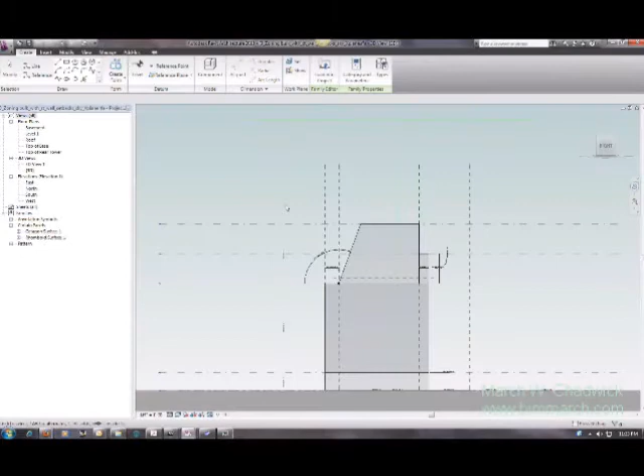Okay, so when I say open this file, you'll see the conceptual mass environment that is controlled by many parameters, or many reference lines, that are kind of floating in space, but that are attached to reference planes and lines.

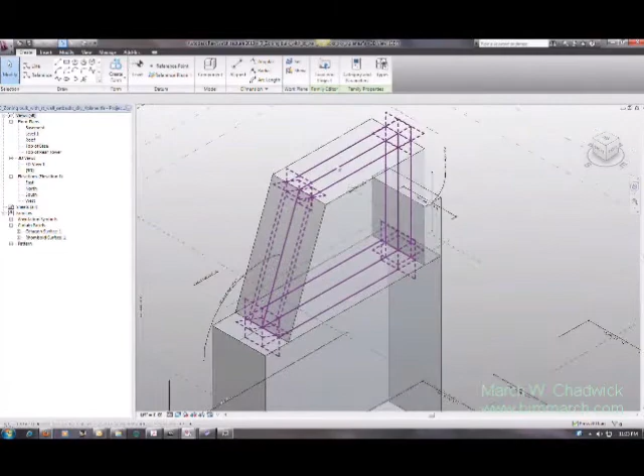This is actually a reference line, which has an interesting character. It comes in with a horizontal and vertical plane, so that you can control its angle, as I've done here with this parameter, which is kind of interesting.

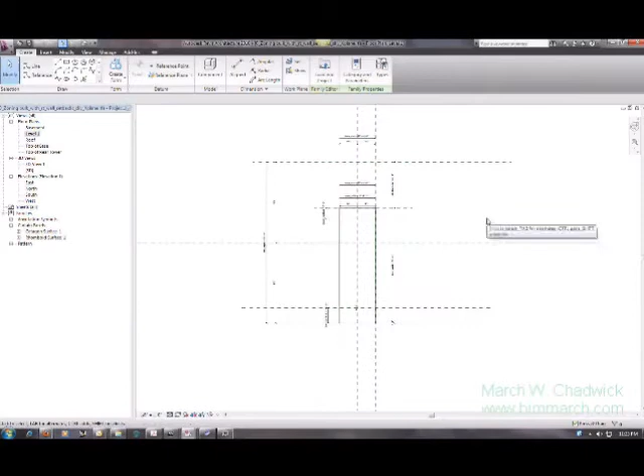Let's go into a conceptual exercise by focusing on what the lot lines are. Now, the lot lines in this particular family don't appear, but I have controlled what the site width is by these reference planes. Now, the building width is on this reference plane, which I'll show you.

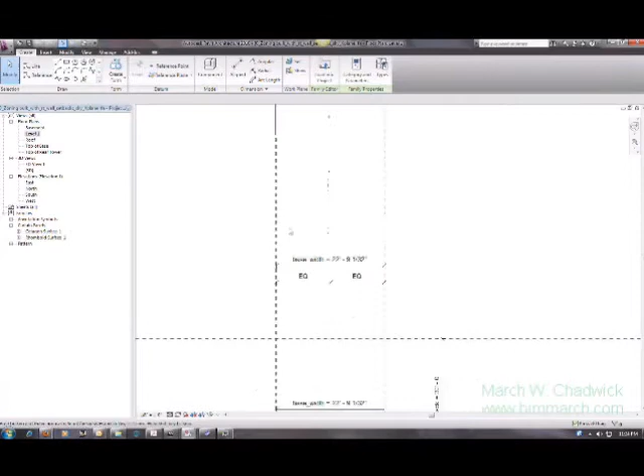By zooming in here, this mass is controlled by this reference plane because of that 2-inch setback that's required in the building envelope. Let me go to the 3D view one more time, and I'll describe to you.

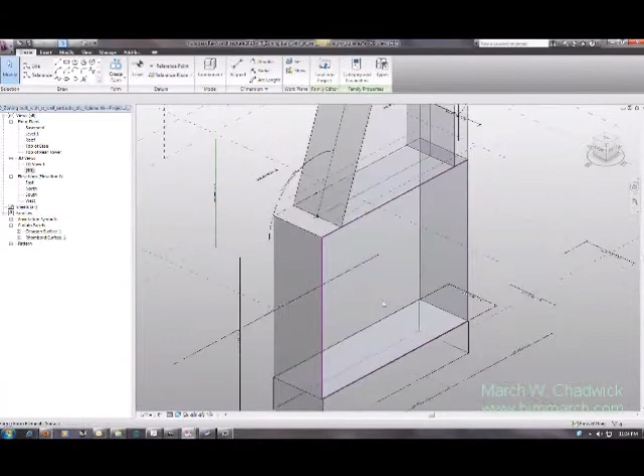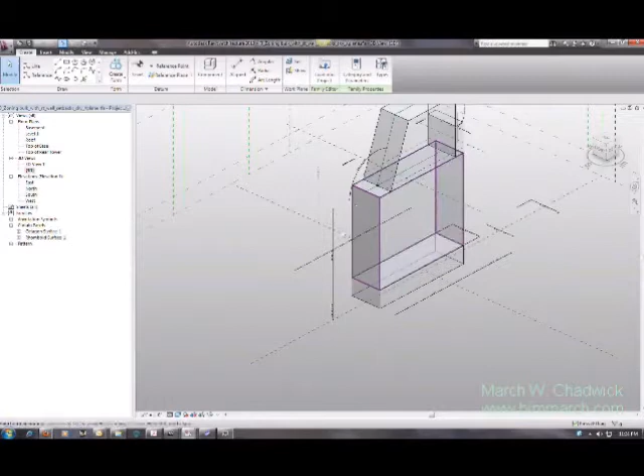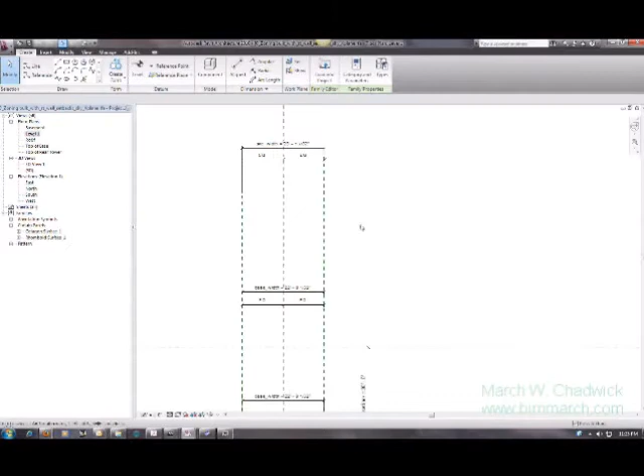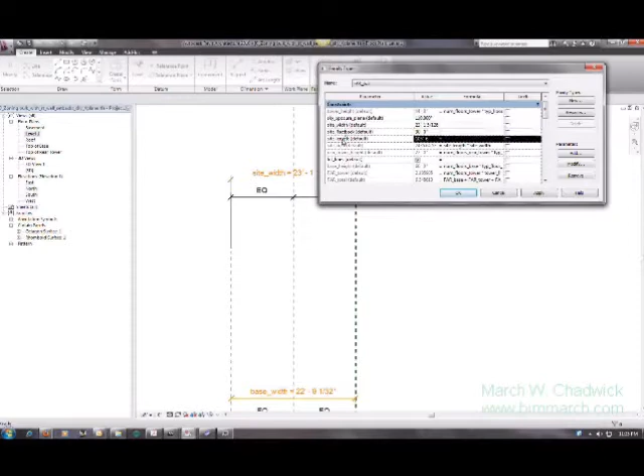Now, again, this site width and the site length are controlled by the parameters that I've set here. If we go to the first floor level view, you can see that if I wanted to adjust the site width, I can go into my types dialog, and here within the constraints, I've created all of these parameters that control the site width, the site length, and the rear setback.

Most residential properties, you're going to have a standard of 30-foot setback. So I'm going to ask you to just kind of stick within the site line, beginning here, going along this line here, and ending here, and this is the front line, and then this is the another side yard here.

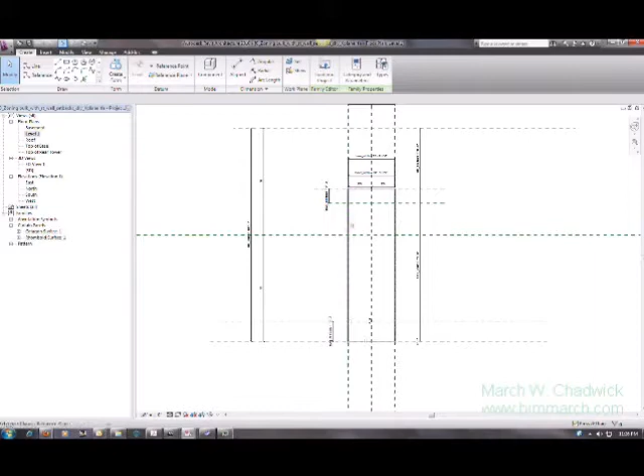Okay, so within this family, I'm going to go back to the 3D view. I've created again all these parameters that control the height of the base. Let's change the height of the base real quickly.

I'm going to the types, and now I'm in the family, but all of these parameters will show up in the project once you load the family into the project. But I'm just going to do it from the family here.

I'm going to increase the number of floors of the base. Here it is, actually 6 floors right now, and those floors are driven by these calculations, which I've totaled up down here. You have to set up the typical floor height, and that floor height goes into a calculation that ends up being driven by the number of floors.

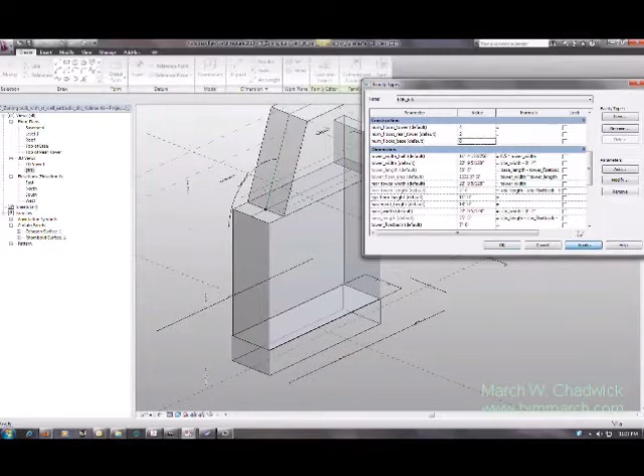Okay, so if we adjust the number of floors to 7 or 8, hit apply, you'll see that the family is driven, similar to the blocks that we created, by that reference plane that's here. Shift, and then holding the track wheel in, and I can pan around.

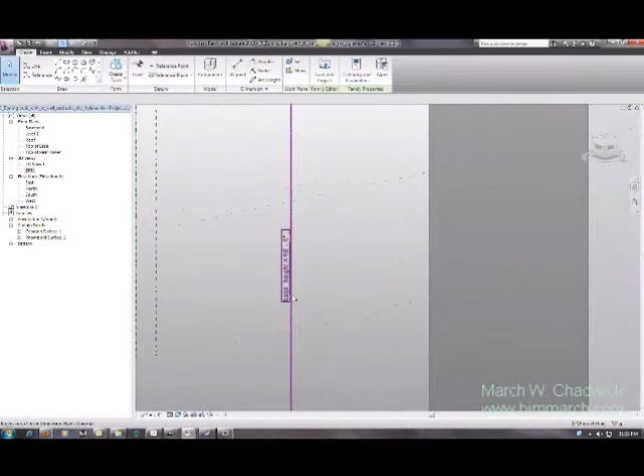So that reference plane is controlled by the base height, and the base height is controlled by the number of floors here. So the number of floors are calculated and go into a calculation that describes this parameter, which is the base height.

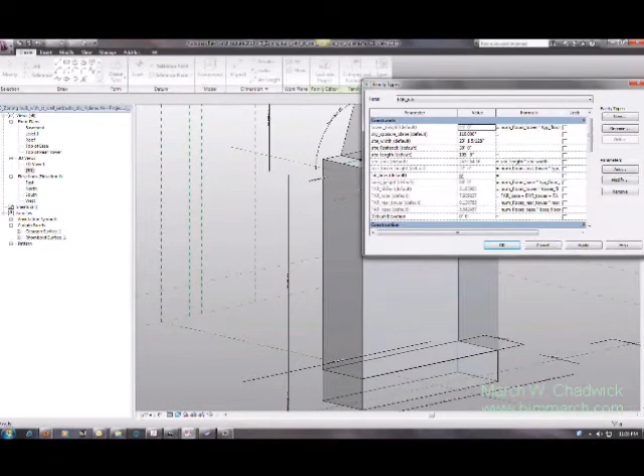Base height is here. The base height is actually one of the constraints I listed in the constraints. But you notice here I can't change this parameter because it is being driven by these other parameters.

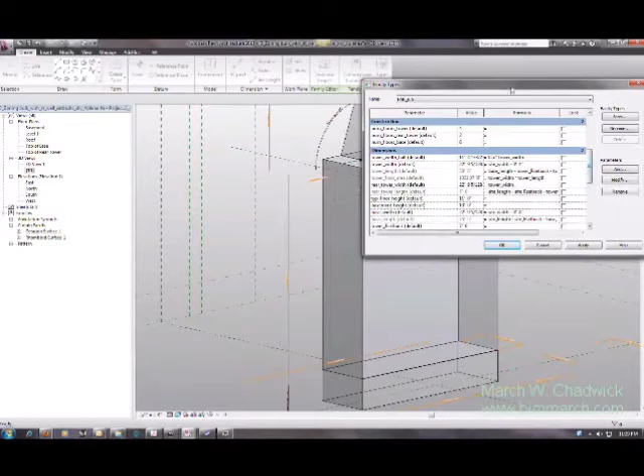The base height is the number of floors times the typical floor height. So that's what we've done here: the typical floor height, which is a parameter we can adjust, is multiplied by the number of base floors, and that controls the height of the building.

So I'm going to bump it down to 6, like we had in the beginning, and we'll adjust it later. Now all of these blocks in the building are controlled by these parameters I've already set up: the base number of floors, the rear tower number of floors, and the number of floors of the tower.

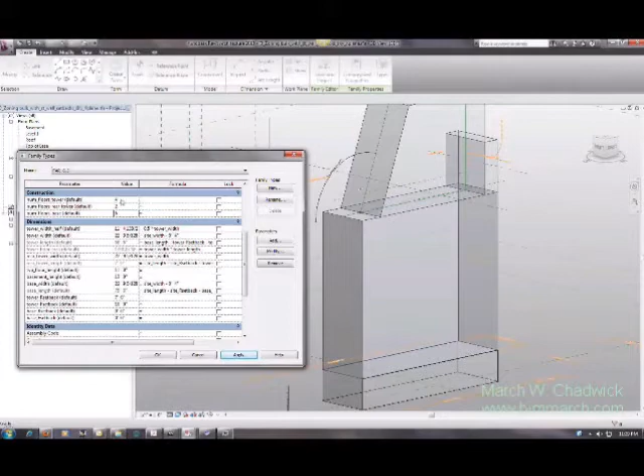Let's go ahead and hit types again. We're in the family, but you'll be able to control all these parameters within the project once you get there, so you won't have to mess with the family at all. You just load the family into the project, and then tweak all these parameters within the project.

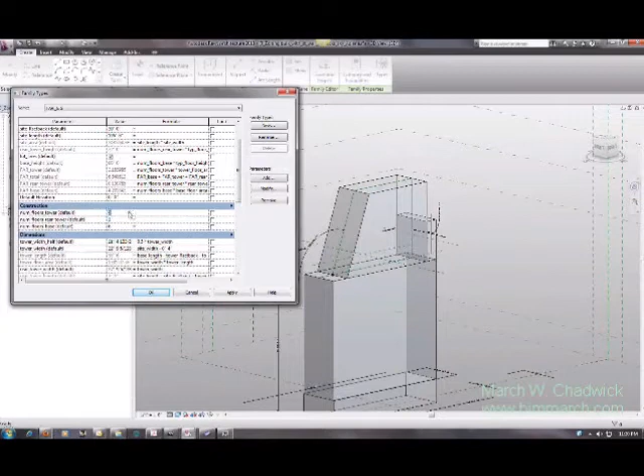But just so you understand what's driving all of this, I'm going to describe to you one more time the tower height. I'm going to bump up the tower height to 6 floors, hit apply, and all of that should bump up.

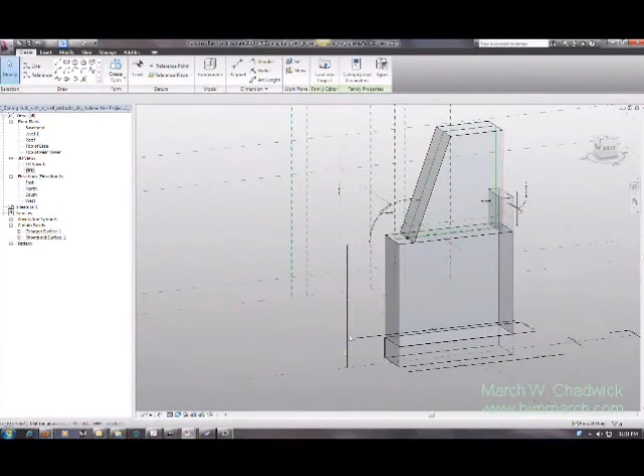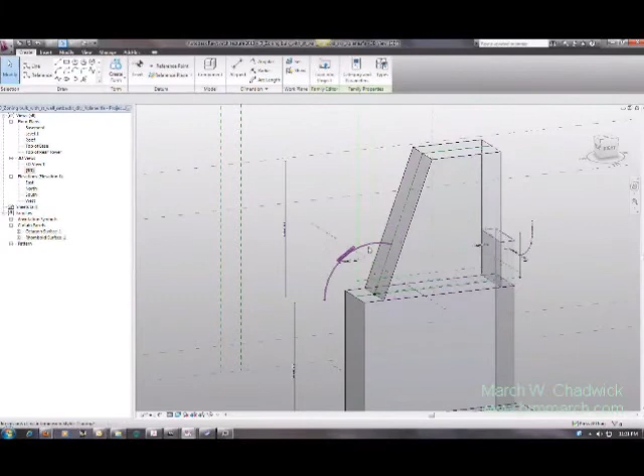Now the sky exposure plane is something a lot of buildings in Midtown will have, because they're trying to provide light and air to the bottom floor. So they have a setback here. Number 1 is a setback, and that setback is controlled sometimes even after the setback, which is controlled by this plane here, has a sky exposure plane, which will even make the building setback further. Most projects just leave that sky exposure plane at 90 degrees, making it vertical.

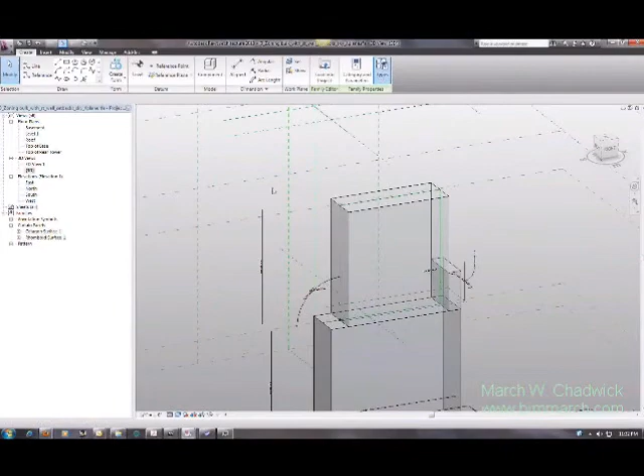Then we'll just adjust the setback of the front setback, which is controlled also by one of these parameters here - there's the front setback, tower front setback. Right now it's at 10 feet, so we'll change that to 15 feet and see what happens. See how it bumps that back.

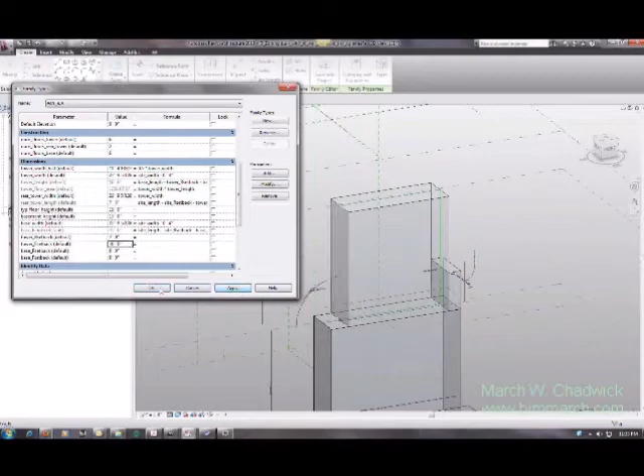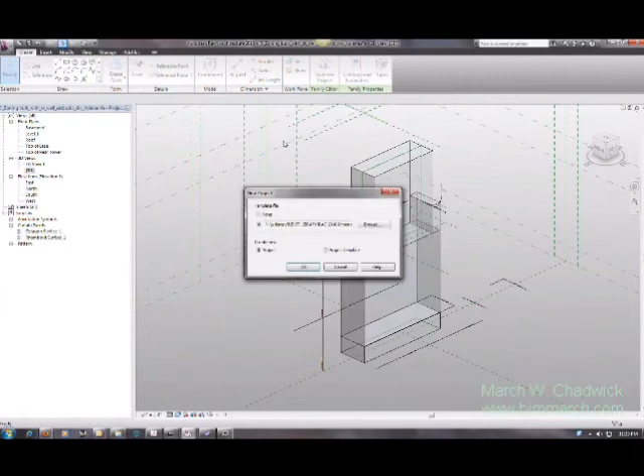So this is a pretty good family that I'm going to now load into a project. Now, one thing about these conceptual masses is they are masses. You've got to remember that. Let's go ahead and actually create a new project, and this new project I'm going to base on just a default template file.

Say okay, into a project. One thing you'll notice in the project family when you hit VG - I type in VG for visibility graphics - is that the massing is turned off. You won't be able to see the object, the new family conceptual mass, unless this is turned on.

Revit prepares us for things like topography that we don't necessarily want to see right away, so it defaults to turning those things off. But you won't be able to see the mass unless you turn it on, so we're going to turn it on and bring it into the project now.

So I'm going to go back to my Manage View, and I'm going to switch my window to the Zoning Bulk - well, I'm going to go to this 3D view. Either one is fine, they're both the same family. I'm going to load it into the project.

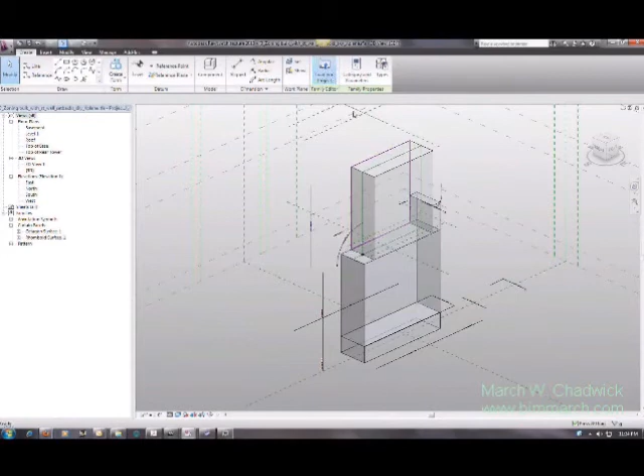It's going to ask me what plane I want to set it on. Since I'm in the plan view, it's going to allow me to set it on this plane. So Revit has enabled the show mass ability on the mass. I'm going to say OK. Now it's going to ask me to place it on a work plane or place it on a face. I'm going to place it on the work plane because we're in level 1, so it'll allow me to place it on this plane that I'm drawing on.

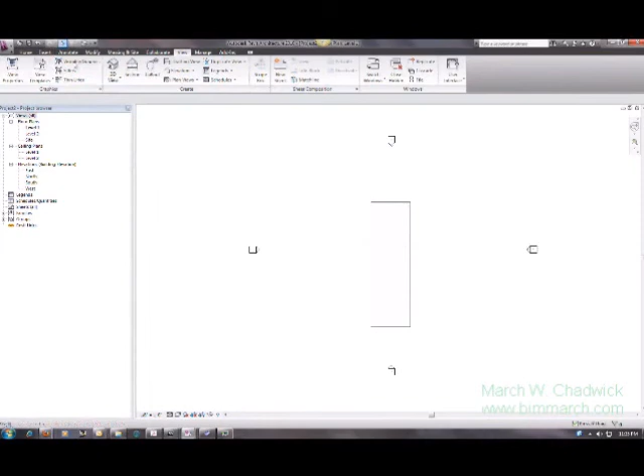All right, so I'm going to click it there, and then take a look at it in 3D. I'm going to click this and make a 3D view - should pop up there, 3D view. Okay, there's our conceptual mass.

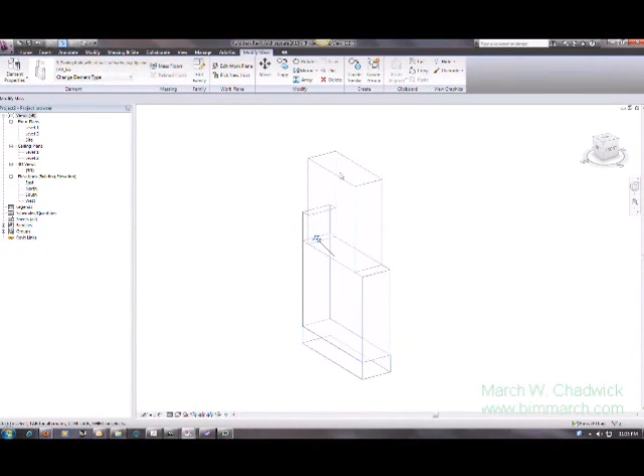Very interesting. Now the conceptual mass, like in the conceptual mass family, is controlled - now it's actually one object here, okay? But I can go into the conceptual mass like you would a piece of furniture or a window or a door, and change the element properties based on those types, based on those instance parameters I've set up in here. Now you'll see that the parameters come in as instances here.

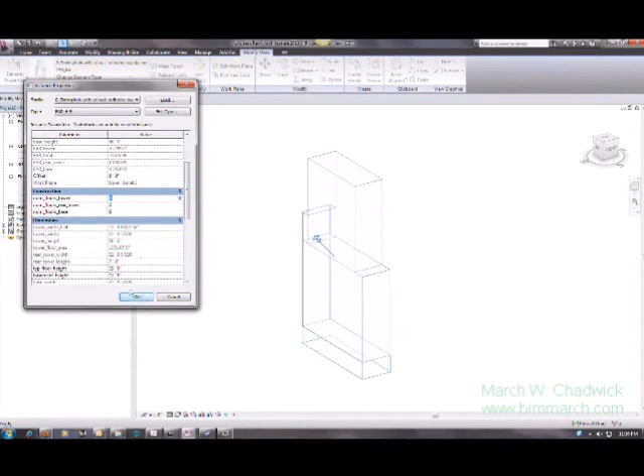So if I wanted to adjust the floors of the tower, I can bump it up here to 8 or 9, say OK, and look at that - it's controlled by those parameters that we established inside the family.